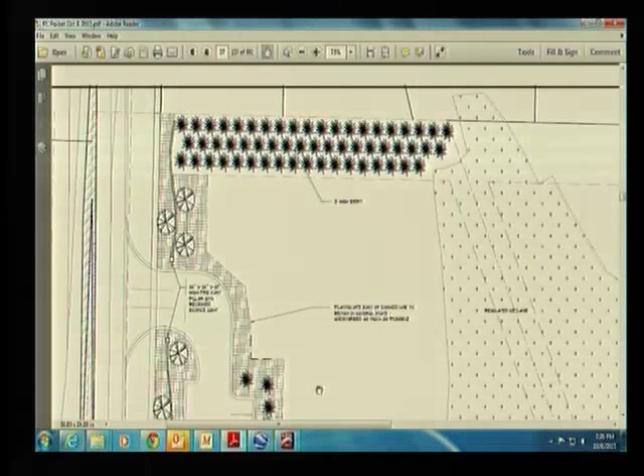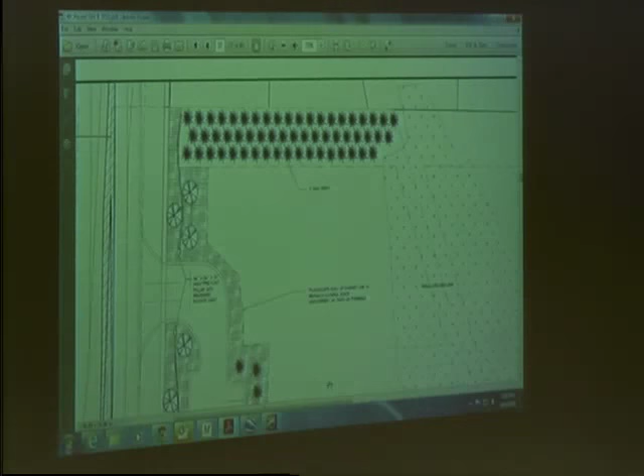I will also tell you that Mr. Hempel and his neighbor and I spoke for quite a while. We talked about pros and cons and other things they'd like. The discussion had to do with what do you want to see, how would you like to see that depicted. At first they said they'd like it mowed and looking really nice and pretty. But then we thought, we don't want somebody to come out back with an ice cream cone and think, I'm going to sit underneath those trees and have a nice park, and then sit there and look into their back rooms. So they told me they'd prefer it to be more natural. Our goal is to disturb as little as possible on the site.

The only other thing I can tell you is that we reward our staff for catching somebody who attempts to buy alcohol or cigarettes if they're underage. We give them a $50 bonus if they catch them. Unfortunately, we're humans and some people make mistakes, and if they do sell, they have to look for a job someplace else. So I want you to know we take our responsibility seriously, and we encourage everybody else to do the same. It's been our policy for 15 years or more. We take that responsibility very seriously, and we do not want to put any control in the hands of those who are not of age. That's part of our culture as a company.

We do appreciate being here, and we will be participating in the community. We have already participated in the community. You can go to the places where we have stores and businesses, go to beautiful downtown Gregory, and ask people what we do and how we participate. It's just a small local place, and I think you'll find you'll like what you hear from the majority of people. I'm sure there's somebody who won't be happy, but if you ask them, they'll tell you what they think about how we participate in the community. We feel like we're a known quantity that you can ask around about, whereas if somebody else comes in, you don't necessarily know what's behind door number two. You don't know what they're going to be like, but we're confident you can go ask about us.

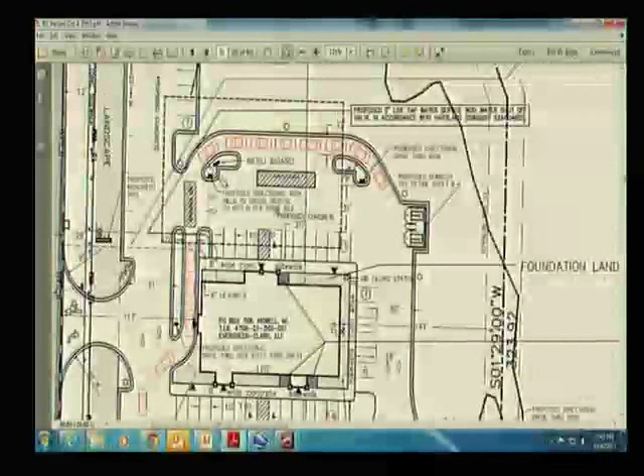Okay, access management and non-residential driveway standards. Dave? So the township in our zoning ordinance has standards regarding the width and spacing of non-residential, aka commercial, driveways - how far apart they can be relative to one another and to an intersection. But ultimately the road agencies have jurisdiction.

While the township is trying to achieve good access management practices by having adequate spacing along our commercial driveways - because anytime you get commercial driveways too close together along a high-speed road such as M59, that creates the potential for traffic conflicts - this proposed driveway along M59 is the desire of MDOT.

And in particular, if you notice, it straddles their property line. So the intent would be that this would eventually be a shared driveway for whatever may develop on this adjacent vacant commercial property, and that user would share this driveway with the proposed Mugg & Bopps.

With respect to the Clark Road driveways, again, looking to align it with Roby Drive. I know we've had a lot of discussions about having the secondary point of access. Long story short, the Road Commission has accepted these driveway locations. So while there are some slight deficiencies from our driveway spacing standards, these are the commercial driveway locations that MDOT and the Road Commission either demanded or have accepted.

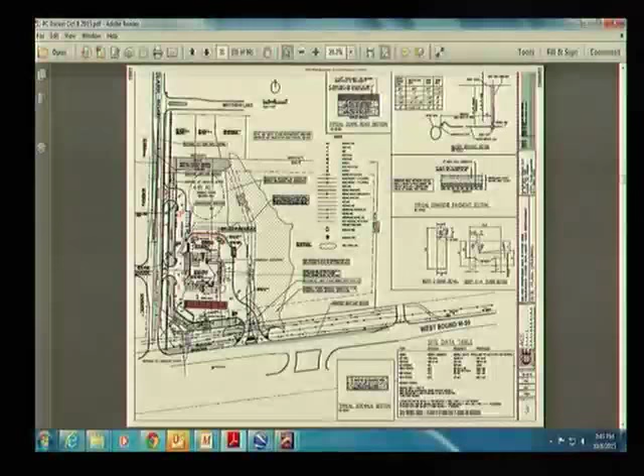The rationale would be that, as all of us in Township Hall and the folks in the neighborhood can attest, the traffic along Clark Road can queue back a certain distance. If left turns were only allowed at the northerly driveway, you would eliminate the potential for outbound left turning vehicles getting blocked in the queue by folks at the southbound approach of Clark.

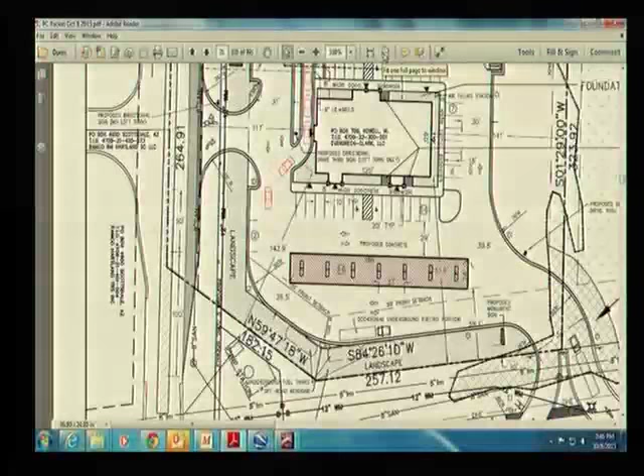I know the applicant, at least on the 16th, was going to look at that and consider the option of an island, a pork chop as we call it, to eliminate the outbound lefts, along with some signage. That's not what they're showing now, so I'd be interested in some discussion on that topic.

The only detriment I can see to that, Dave, is then you're pushing all the traffic north, and everyone who wants to enter or exit onto Clark Road has to go north first and shine headlights into the neighborhood. Whereas if you let them come out right there at Roby, I think that sort of thing will sort itself out during peak times.

People are going to say, 'Oh, I'll go north and get behind the line.' I would agree, most customers in non-peak times it'll be open. Most customers are going to learn pretty quickly to avoid going out this way to get back out to 59.

Then you're going to go right back out the same way they came in off the highway. Well, I'd agree with Jeff's comments. I think the person who wants to try making a left out onto Clark at 5 o'clock can sit there and wait. If they travel north, they can get in line on Clark Road or take 59 direct, because if they're coming out on 59, they're not going to get on Clark Road. Why would you do that? That just doesn't even make any sense.

Well, it just depends. Like he says, that's mostly out of convenience if people are going there. They're going to see an exit and take it, whatever's closest. They might not want to drive around the gas station, the gas pumps, to get out to the other exit. So yeah, they'll take the most convenient one. And at 5 o'clock, it'll be directly to 59.

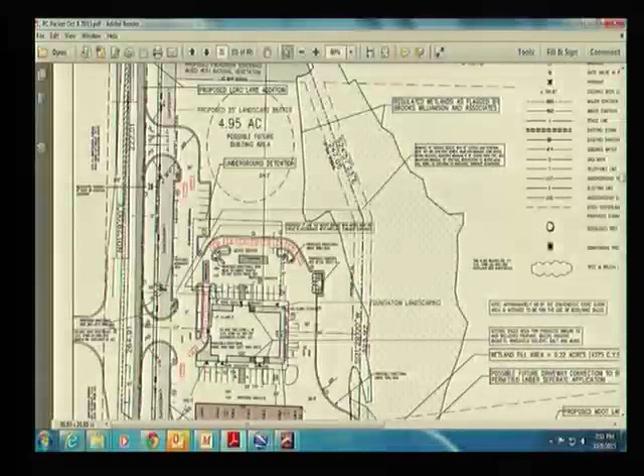I would say that if outbound left turns are going to be allowed at this driveway, it does make sense to have a dedicated left lane similar to this one, which would address two issues: outbound lefts not blocking outbound rights, and it also widens the driveway a little bit to allow for a wider turn in for the inbound trucks. That's what I would think. What do you guys think? I agree. I'm still wondering how they're going to make those trucks turn.

Well, the other issue was, I think, the way to eliminate the landscape issue with the tires going into the landscaping is to make that curb a little bit wider, so that when they do cut the turn short, they're on a hard surface, not a soft surface. Correct. So that's a possibility. Wide mountable curb. Yeah.

So is the question to add a lane or a mountable curb? Is that where we're at right now? Well, I think a mountable curb will still roll off, but I think it's going to need to be wide. Lane's going to help. I think they're saying they're going to widen it, right? So that it looks like the north. Similar to the north?

So they'll cut down on the possibility of damaging landscaping, and then they can also widen the curb. And as long as you don't get gas deliveries during the peak donut time in the morning or 5 o'clock in the afternoon, that driveway's probably not going to have anybody in it. Right. Yeah, so you can use the whole driveway at that point. So I like the added lane.

Okay, I like it wider, like the north side. Okay, so are you okay with that? That's fine. Make it similar to the north? I'm guessing they're going to have to look at a little bit of realignment relative to Roby to ensure that they have the proper lane alignment.

Okay, put in the motion here. Anything else on access management? Landscaping and screening. Sue, do you want to hit these one at a time or in total?

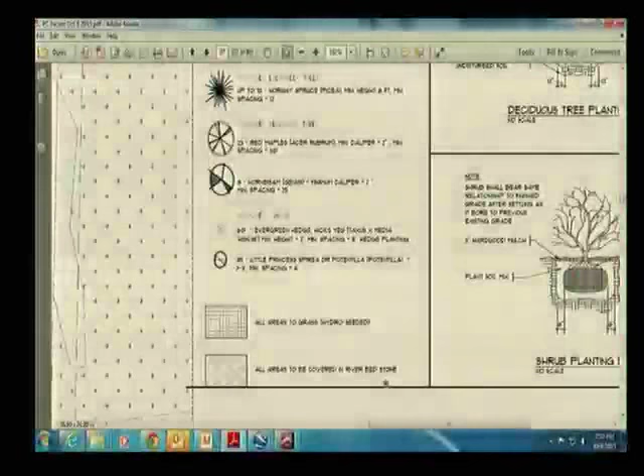Okay, and then on the size of the plant material that you've listed on your plant list, we have requirements. If I understand correctly, on your latest version, if you zoom in right there, the shade trees, I think you've got a 2-inch caliper. I don't know that they changed from what they were. And is that what they were, 2? They need to be 3 inches, the shade trees, per our ordinance. The screening evergreens need to be at least 30 inches.

I agree — what do they say on there? For that, when they're planted, they're at 30 at least, right? I think you've got a 2-foot minimum. So we just need all those sizes to be compared with our ordinance and make sure. Like the hornbeam that says 2, should that say 3? That hornbeam, where you're using it, is at the foundation building, so that's okay there — it's the one on top of the red maples.

Okay, and then the evergreens — it says 2-foot minimum, but when they're used as a screen they need to be at least 30 inches. I think they say 2 to 3 feet. Yeah, and she's saying they're going to be a minimum of 30 inches. Yep, so just try to get all those standards set.

You up with us, Dave? Yes, got it all. Okay. Anybody else on Greenbelt landscaping? If not, let's move on to foundation landscaping.

On the foundation landscaping, we have a section in our ordinance that talks about the width of it and also the frequency of the trees and shrubs. Right now, you haven't met the quantities of shrubs needed.

When we examined the drawing you sent us, apparently we didn't understand how that's calculated, because we thought the calculation didn't include all four sides of the building. We thought it was a side and a front, so that's what we calculated on. So we need 60 more feet.

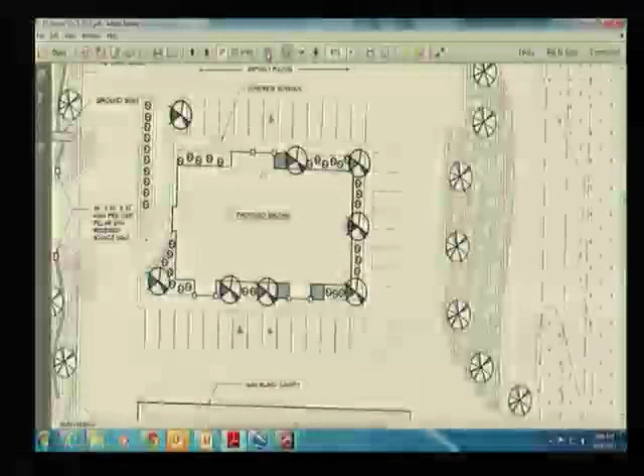I can tell you about the number of times I've been out there at 2:30 in the morning plowing snow—straight runs are nice. When I look to design and build, I want it to be functional as well as aesthetically pleasing. So I appreciate what you're saying, and I understand. I'd ask that on that corner where Dave's cursor is right now, we could put in some facilities that will do what you're saying.

I'd look for some direction from you. Do you want them full 20-foot length? Are you happy with a mushroom island—a tree in the center with curbing around it, mulch in the middle, and shrubs around, so it's a softer corner? How would you like us to approach those, Sue or Dave? I'll take the first stab—we'd be looking for some interior landscaping to meet our standards. This is a good opportunity for it. Yes, we'd be looking for a raised landscaped corner island.

It can be, and really should be, shorter than the parking spaces adjacent to it—3 feet's typical on that. In addition to breaking up the parking lot and providing some green space within it, I also think there's something to be said for it—it would enhance circulation around your site and perhaps decrease the potential for someone coming around this corner too fast and clipping a parked vehicle.

Understood. I've driven a snowplow myself and I understand the concern, but I think we can make it work with the landscape islands—3 feet less curbed, tree, shrubbery, plantings, and mulch on all four corners. So we're doing this one over here on the southwest.

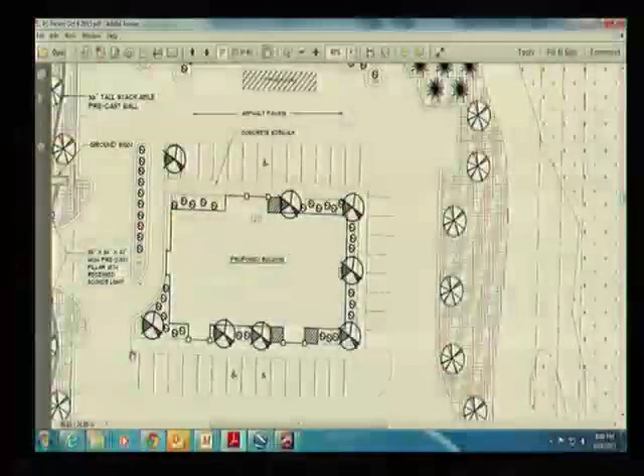That's the northwest. Yeah, there's the southwest right there. I think we might be losing a parking spot if we put one there. But as folks come out of the drive-through, that could enhance circulation. Yeah, but they could clip it too. Yeah, that corner looks fine to me. I'm happy with that corner.

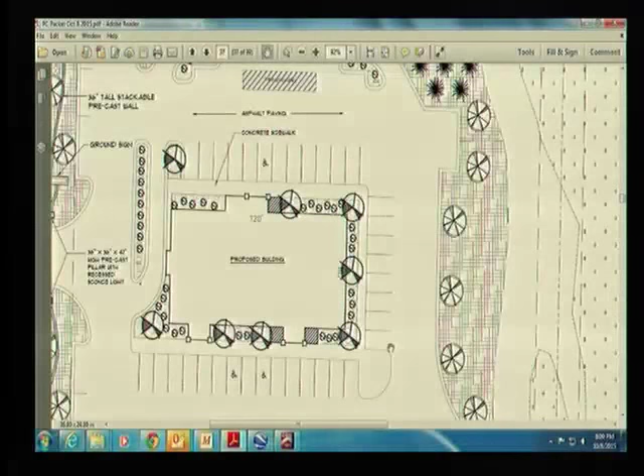I think you're going to force traffic out into the path of regular traffic after they're coming out of the drive-through. Or they can take this and head a little bit into that island, slide the parking over. We're talking about the south. Yeah, but you can gain some room. Shove it over a little, and just have a narrow strip. Duplicate the north on the southwest and shove the parking into the island over on the southeast.

We would counter that the southwest corner has a peninsula currently as it comes off the drive-through, which would signify a commitment to landscaping. I agree with you wholeheartedly on the southeast and northeast corner, and the northwest has the peninsula marked there in the drive-through. That's what we would propose. I think that southwest corner is fine the way it is. I do too. All right, you okay with that?

So we'll change the southeast and northeast parking lot corners to include a curbed landscape island with trees, shrubbery, and mulch. Sue, would you like those two to match each other? Is that your preference on those two corners? That would be ideal. Okay, and what you've got on the northwest corner currently, you've shown your tree.

We prefer a tree. And there should be at least 50% of that island covered with shrubbery. Perfect. And the ones up above on the north that cradle either side of that loading area, look at the square footage of those islands and make sure those are full. When we redo that calculation, we'll go through that with Dave, we'll fill it up. It'll be full. Before, we had so much on there, you couldn't. Okay, I agree. You remember what that was like.

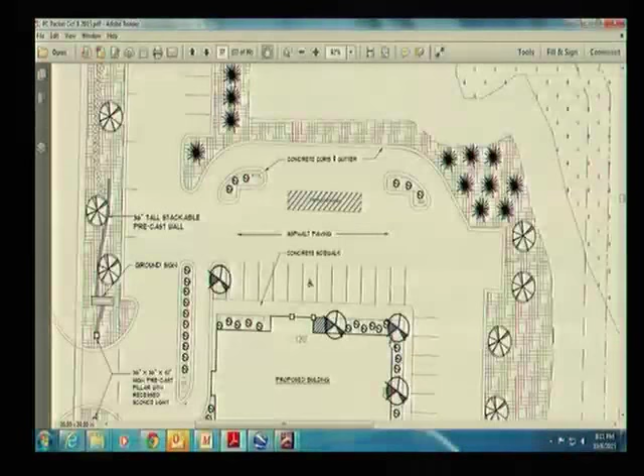So I suggested that they calculate the square footage, and look at our ordinance, because our ordinance says at least 50% should be full of shrubs, and the balance needs to be a combination of ground cover, perennials, and mulch. Right now, they're mostly completely stone with 3 shrubs in them. I just wanted to make sure those weren't overlooked, because we don't want you to come back.

Anything else on parking lot landscaping? I think adding those shrubs will be very easy to do, and converting the stone to mulch will be very easy to do.

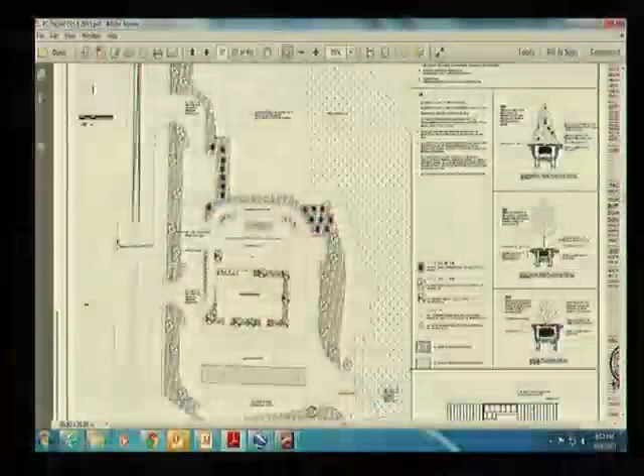Item D, perimeter landscaping, Planning Commission determination required. So the applicant is asking the Planning Commission to accept preservation of a lot of the existing vegetation within this area along the east, and then within this area to the north. You can see there's a dashed line meant to indicate where they intend to leave the existing vegetation undisturbed. So the applicant would be asking that they be given credit for that in addition to the plantings being provided to satisfy their parking lot perimeter landscaping requirements, and that is something that's permitted so long as the Planning Commission agrees with it. Staff thought there was an opportunity to maybe enhance the north area of the parking lot, so whether that's additional trees or some relocation or a combination of both, just to provide as much buffering as we can from this end of the site heading back into the residential district.

I agree with both those comments. I do want to give you credit because there is a lot of natural vegetation that's going to be left there, but I agree, Dave, that there is some opportunity right in that stretch. So sprinkle some things in there just to kind of close the gap maybe a little bit between 2 sets of plantings, and I think that would be good. Agreed, sprinkle would be good.

Area right here - you familiar where she's talking about? Yes, between the entrance to the drive-through and the exit, right along here. The whole northern section across that, yes, right kind of here.

It's a bald spot, just another buffer - open, natural buffer, residential. It's another layer of providing some screening.

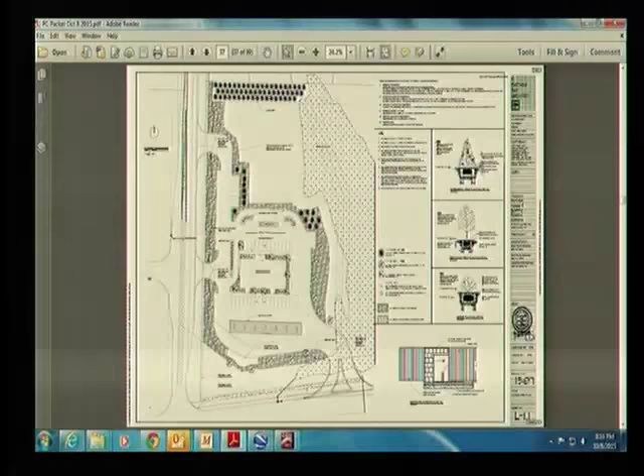There's 2 or 3 or 4 trees right in the back of Mr. Hempel's property that he said, I don't want these to be gone. And so I think that we're going to have the berm - it may not be continuous, but it will kind of come around a couple of those trees in that area.

Because they'll be left, but our expectation is that we'll be putting in between 50 and 75 trees across here, and it just depends on what happens over here. The feeling that we have is that if we come up with a 3-foot elevation across that back and the majority of the area there...

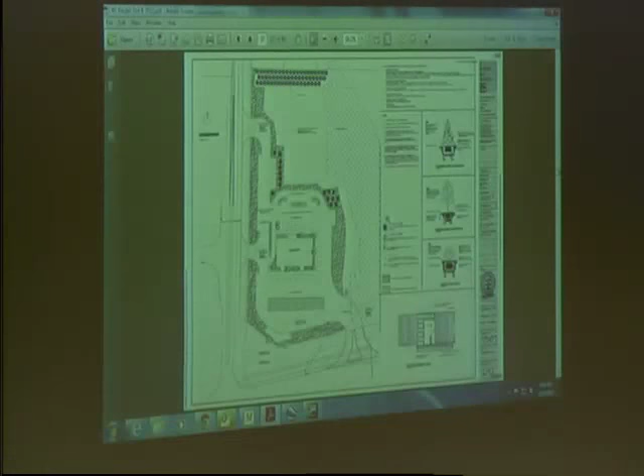It will, with - and we spoke to Dave also, when we order trees, it'll be 8 to 10 foot trees, and it will be 2 varieties of spruce so that we ensure that we don't have like what's happening with, was it the blue spruce. So anyways, it's going to require some determination by the installer.

But we're committed to making sure that this is a forest across here. And if we have to come out a little bit, it may not be that perfect line in rows like that, but it's going to be a forest, and it's our goal to block the property from seeing things.

So it's not just the 2 rows, we think that the 3 rows will give us that because, as you pointed out along the front with the changing grades, Sue...

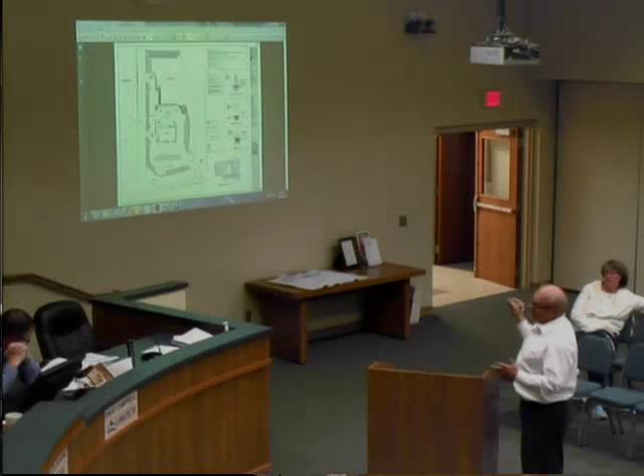We want to have a top surface area that's pretty wide, so that certainly that one main row will be as tall as it can be, and then you've got to be spaced out a little bit, and they may be off that edge. I don't know how they'll fit in, but I don't know if that makes sense to you. I know it's a little bit abstract, but I can tell you that we will build the forest there.

And block it. How are we going to? So if we don't get it right the first time, we will get it right the second.

So, if I can jump in, I think there's certainly something to be said for preserving some of the vegetation that's back there, which is mature and big and serving a purpose for screening and buffering. I don't think the answer is to clear all that out in order to create the 3 rows that he's showing, nor do I think is that necessarily Mr. Leekander's intent. I know he and I had a chance to talk about this a week or so ago.

I think what could be a solution to this is for Mr. Leekander to commit to a certain quantity of trees, whether that number is - I think he mentioned a range of 50-something to 70-something.

Commit to a certain quantity, and commit to a certain percentage of that quantity being 8 foot, a certain percentage being 10, and if we want to go up to 12. Then give some flexibility to have some field discretion once these trees actually go in, rather than saying that tree must go there because that's what's shown on the site plan, even if it means taking down a quality mature tree that's already there, as long as he's meeting the requirements for quantities, general location, and heights of the trees proposed, there could be some field decisions once they actually go in.

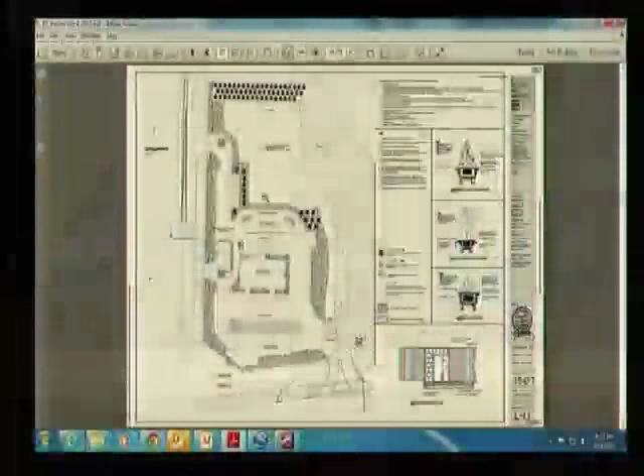And we've got a wall around the parking lot anyway, right, that we think we're going to be screening most of the headlights with. Well, when you say wall, are you referring to the addition of trees through here? Well, and where's this wall? Clark Road wall. No, that's just decorative. That's on the perimeter, yeah.

Okay, where we're at, we are adding screening to the north side of the park. Yeah, I know, I'm just trying to think of what the sight line is going to be. Well, I have a question for Sue.

Sue, does a conifer tree generally, if left alone, keep the branches that grow to the ground, or do they die back for some reason? Typically, when you let them be and you're not weed whipping or whatever, you can get them right down to the ground, and they should stay at the base. It's when people start to mow and trim and limb them up—but typically they should go down to the ground, so you're not going to be looking underneath the branches.

That was my concern. That's what it seemed to me like. So any height that we can add—but again, with the grading, we understand if you can get a very naturalistic berm, that would help with it. But it's got to be, like you say, kind of figured out in the field to make it work. Well, I don't like the idea of figuring it out in the field.

I know—because it becomes very tough to add anything later. I understand you're committed to it, but it becomes tough for us to force you to do it because it's not on a site plan anymore. Well, and we don't want to kill anything that's there either. And that's my point—and your point. Hold on, just let me finish here.

My point is that I think a survey can be taken out there, and you can pinpoint the trees that you want to leave, and you can design easily a naturally looking berm. Happens all the time, so I think it can happen. I think it can be on the site plan. It doesn't have to be strict, and I understand that in the field you're going to make changes on the fly, but at least there'll be a general direction noted on the plan that we can get back to.

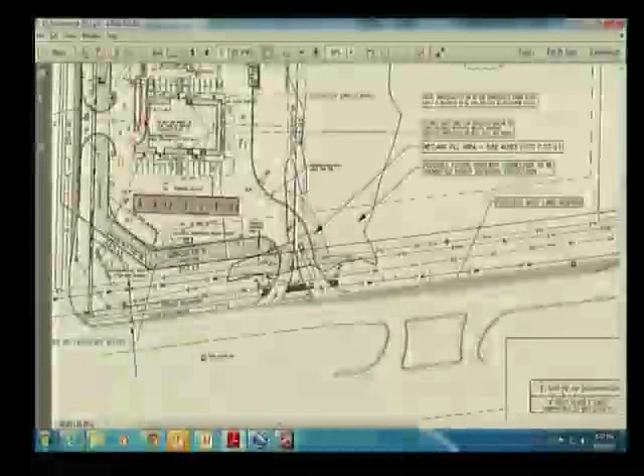Where's your property line at in relation to that? It is just at that 257.12, that's our property line. The eastern property line, yeah, the north-south line, it cuts in right there. It splits the parcel right there, chops it.

So we're saying that the next development would have to make that connection. Well, we think it should come right up here. Right, so it'd be straight across, then right up here, and then over, because otherwise you're into the wetland, and that poses some additional problems. I can see that on the grading plan.

It would be consistent with the sidewalk pathway separation from M59 on the west side of Clark Road, and there would be opportunity to get an alignment when we get this gap filled on this property. I've had some conversations with MDOT, and this was something they were looking for too. So if the planning commission's comfortable with it, we could leave the pathway as proposed, subject to MDOT review.

Correct, it's identified as a canopy on the drawing. It is, it's an area to cover those. It's curved, I believe. That particular one is going to be square coming out, and it curves out. And yes.

Is that the same color scheme you've used on the other Mugg & Bopps? This green is different now, but everything else is very similar to the other colors. So this green is just adding a little bit of color where the entry awning, if you will, is located. It's just a little structure there. Do you know if that's clay brick or masonry brick?

It is man-made, but... it says it's porous. I would guess it's clay. That would be a guess. Well, clay's required, that's why I'm asking. I'm guessing it's what you're expecting to see.

That's what I believe. Is that what it says on the drawing? Yeah, I can see, but we were intending for it to be real brick, not what you'd think of as fake painted stuff.

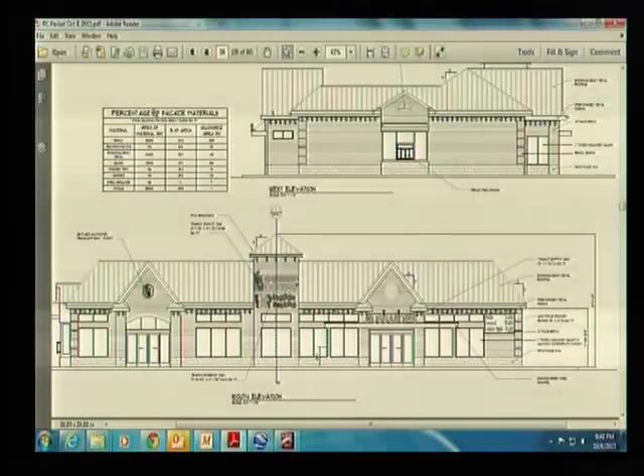What is the gas canopy top? We have the brick columns, and then it goes to a round metal pole, and then of course we have this metal roof structure.

What colors is that on the plan? It's dependent on the brand of the fuel. Okay, you're talking about the facade, the fascia band on the canopy? We don't know what brand of fuel that's going to be there at this moment, Larry.

Okay, well, we should talk about the dissonant color thing. We typically haven't seen bright blue or bright green canopies. I think you can have the color band in that, but I don't know if we've seen them all green or all blue, because those are probably the two colors you're thinking of, or if it's Shell, it could be orange or yellow.

I would say that the base color would be the white underneath of the fascia itself, and then depending on the brand, they have a band that you're talking about that they identify their canopy with.

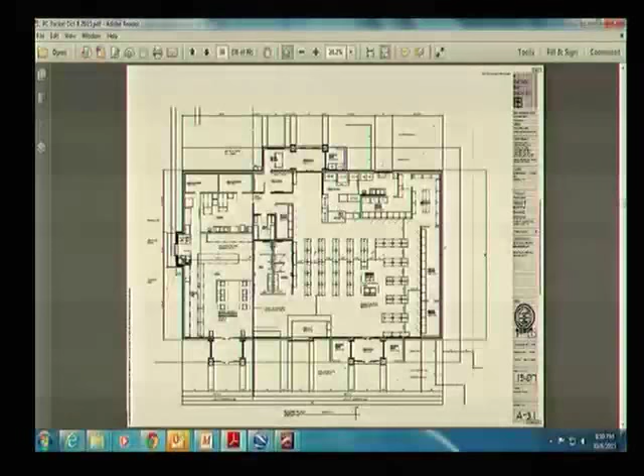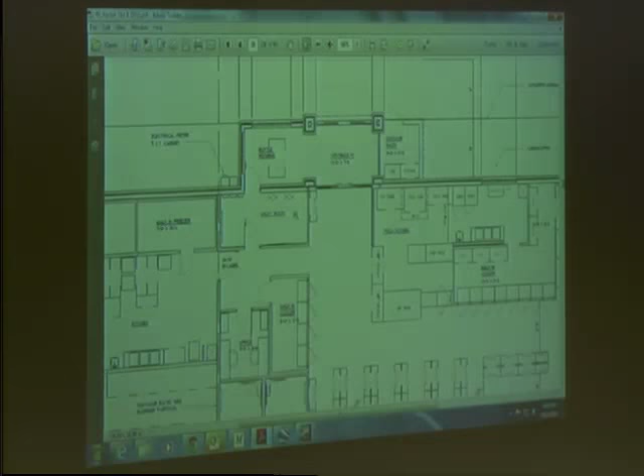Let me add one item: this area right here is where we're expecting to have a space for bottles, so the consumer, when they come in, can use the bottle machine to get rid of bottles and cans. It may end up on this side as opposed to that side. I don't want to surprise you, but I wanted you to know the final design, so that when they walk in we'd like them not to bring dirty returnables into the store. When you enter the back vestibule, you'd be on the right or left-hand side to a bottle room, depending on which back room we use to service that space.

The opposite of that would be the covered, walled outdoor sales area. That's fine, you'd be surprised by that. So if you flip the bottle return room, you'd flip that utility room too? It's very possible, I just want you to know we're finalizing all that. So it's internal anyway, stay tuned. It's the same thing, but a mirror image.

Did you need any more questions or conversation on that? The outdoor sales area is pretty common. You did add a wall, though, at the stations I think. They're there, it was there last time, and we recognize that they're there. So that's where that stuff goes, there won't be stuff out at the pumps and those kinds of things. Not unless you change your ordinance.

All right, pallets and mulch, not unless you change your ordinance. All right, thank you. Did we need to cover anything else on that point? No, you would just be acknowledging that they are providing an outdoor sales area, and making a determination that it's permitted so long as it's contained within those designated areas.

All right, so item 6: the applicant will provide the township with documentation from a sound professional which demonstrates compliance with the standards of 4.283, which requires that no sound from speakers shall be audible at the property boundaries.

As you can see, he's proposing the office building with the parking on the south side. This was by design to keep the parking on the west or south side of the building, again to minimize impacts on the residential properties to the north. He is proposing an overhead door on the west side of the building. My understanding is the back of the building is where the owner would keep some of his equipment and tools, things like that. So he does want drive-up access to that.

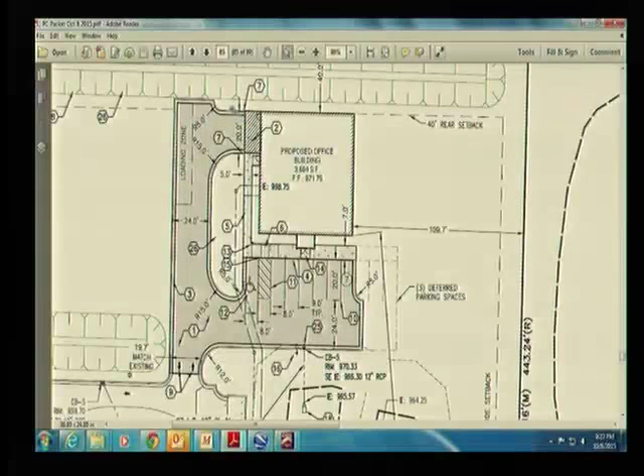One of the things I want to talk about is the width of this proposed access lane. The applicant is proposing a typical 24-foot wide commercial drive. The Planning Commission does have the discretion, if they so choose, to narrow that, again to minimize impervious surface and minimize the view for the people who live next door. The applicant has submitted a landscape plan to provide a berm and screening to those residential properties, and we'll have an opportunity to talk about that.

Procedurally, this is considered a site plan. He is not amending the special land use component of the restaurant. The KFC with a drive-through was a special land use and had to go to the township board for approval. This being just the office building doesn't otherwise alter the drive-through component, so it is not amending the special land use. Therefore, it is a site plan that can be approved by the Planning Commission without another trip to the Township Board.

The recommendation of staff in our letter dated October 1st, 2015, is conditional site plan approval, subject to a number of issues being addressed on a revised submittal that we would review administratively, so long as the Planning Commission is comfortable with certain decisions within their authority to make, particularly the deferred parking. We're seeking deferred parking for this office building, and some discretionary decisions regarding screening and buffering, particularly along the north property line. With that, I'll pause and see if the Planning Commission has any questions in particular.

Otherwise, obviously, the applicant's here to likely make a presentation of their own, and we're going to let him do that. So the floor is yours. Well, thank you. I'm Bill Beckett, W2 Development, working with Glenn Llewellyn here.

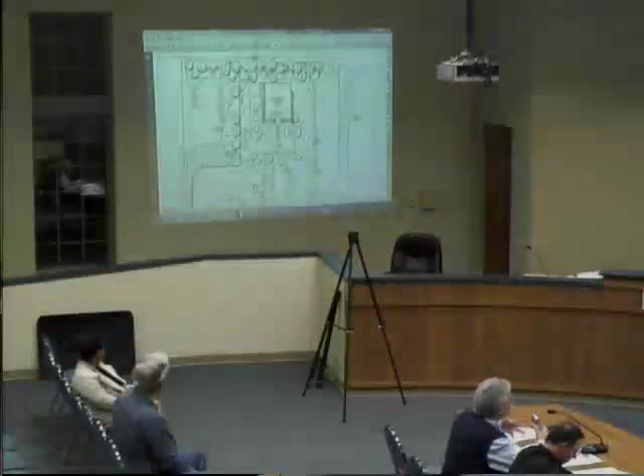We would be willing to shorten the berm, spot locate some of the trees using the same material count, and enhance some of the plantings along the east side as Dave suggested in his report.

In addition, I think there was a discussion with regards to adding a screen wall, an extension of the rear wall of the building. The north wall would extend to the west to the limits of the service drive to the overhead door, so that could probably be about a 30 or 40 foot wall, approximately 6 feet tall, same materials as the building is.

So in talking with Glenn about that, that is something that would be reasonable to do.

In terms of building materials, we have sample boards in front of us. Again, the color scheme—do you want me to pick that up? Can you see that up?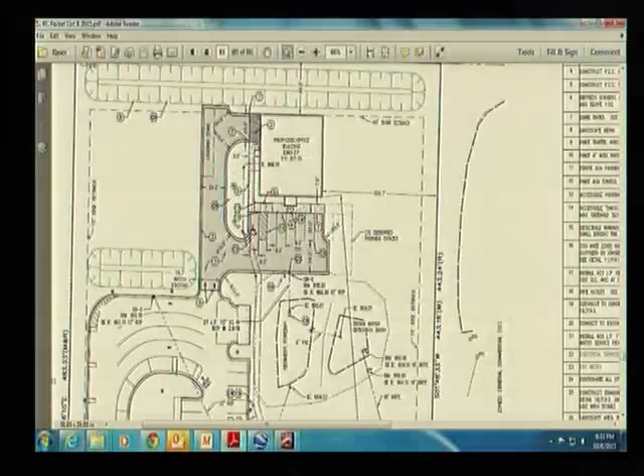I believe at that point he was thinking he was going to meet his minimum parking requirements by adding some parking to the west side of the building. Our thought in that concept meeting was let's not provide any extra parking that we agree probably isn't needed for this office building until that need arises. So what the applicant is proposing is to keep the parking on the south side of the building, again, minimizing to the extent we can any impacts to the residential development to the north, with the opportunity for 3 more spaces to the east should the need arise.

The Planning Commission does have the discretion to allow for deferred parking in a case where it can be demonstrated that meeting the township's typical parking minimums wouldn't be optimal, and I think this is one of those cases. Well, obviously the applicant feels that way because that's what you proposed. We run probably 3 to 4 people at our office, 3 to 4 days a week.

We had originally had those parking spaces on there, but again, to help with screening of the neighborhood back there, there's no point to put those parking spaces in. What we have to be cognizant of is if someday this is no longer Mr. Flewelling's office, but he sells it as some other office building, insurance office, whatever it may be, we at least know there's an opportunity to put in the additional minimum parking if and when that day comes. So that's where we show the dashed line and the deferred parking.

Correct. Everybody fine with that? Absolutely. Okay, we're good. Barrier-free parking, we're good. Parking lot, driveway, internal roads, we're all good on. Loading, let's talk about a 12-foot service drive and a T turnaround.

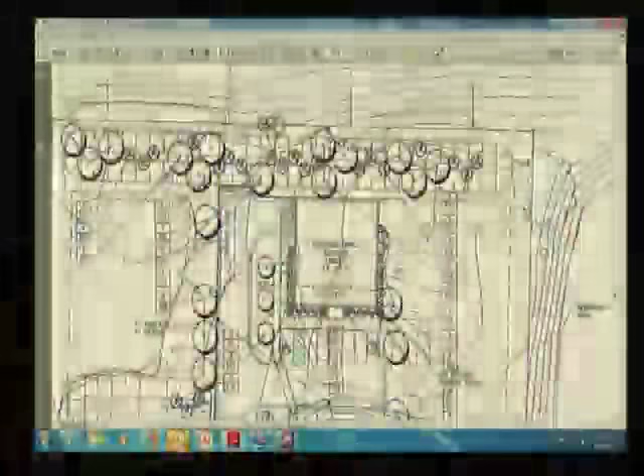If you look on the site plan and extend the new west driveway line straight north to the residential area, it is shown. If you extend this curb line straight north, that's in line with the property line between these two houses. At that point there's a couple of oak trees that are a little bit offset, but that line generally is where there's heavy screening existing already, and then it kind of filters and gets fairly light over on the east edge.

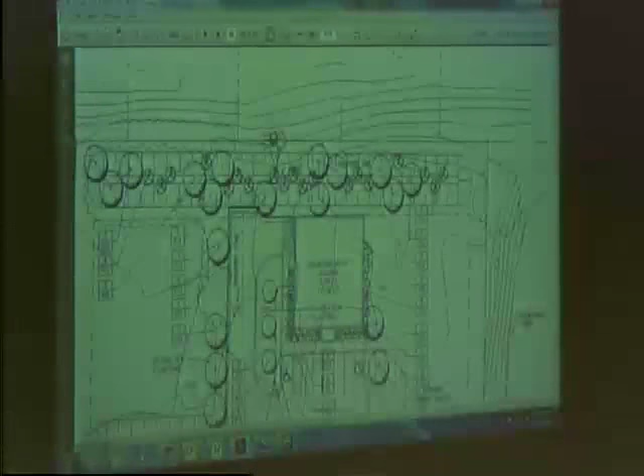Looking at it like that, it would make more sense to spot trees within that area rather than just bulldoze and create a new berm. I think it would take several years to recover from constructing a berm and planting trees on it.

Yeah, those trees are huge that are there.

Well, I think staff concurs. If we could maintain the same quantity of trees proposed along here but avoid the berming at least up to that area, then we're not hauling in dirt and taking out vegetation to replace it with a berm. We can spot plant this same quantity of trees and start the berm where this good stand of existing vegetation peters off, then create the berm from about this line all the way to close to the east property line.

Our thinking is we don't want to cut any trees out, but take those trees that should be in the west and push them all to the east to make sure it's just as thick all the way along back there, because the west, for whatever reason, is so thick. If we push those trees over there, we'll be thick the whole way along.

So he's saying something different than you said, Dave. You said take the berm out but leave the trees and spot them. He's saying take the berm out, take the trees that were there, and move them to the east. Well, I think he's talking about the ones on the drawing. Yeah, the trees to be newly planted. The new stuff, right. But what we're saying is you might want to still plant some new trees on that western portion.

Yeah, spotted, to fill gaps and things like that. Get some evergreen trees in there too, because you're right, it's all deciduous. It's a lot of deciduous. Our 6 months of no leaves.

So Dave has 3 points in this particular topic. Some variation in the height of the evergreens should be considered, since they're all proposed to be 8-footers. I need to go back and read the ordinance, because I know we require a variation in height. I thought it was 8, 10, 12 after the last applicant said no, and it's got me questioning it. This is, of course, the one meeting where I forgot to bring my copy of the ordinance.

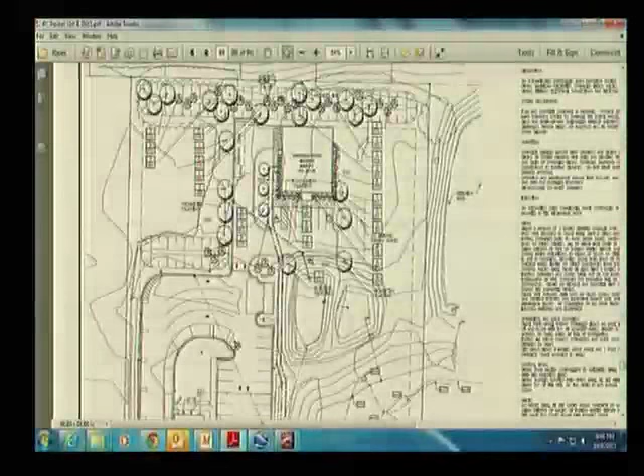So, Dave, we need some lighting comments from you here. We have minimums for the illumination levels at various components of the site. It has to be at a certain minimum at your building entrance, a separate minimum for your parking lot, and another minimum for your entrance. In general, there's a couple dim spots in this parking lot, but that's not by design. When we had conversations with the applicant, we asked them to keep the parking lot lighting on the south side of the building and to keep it at a height where the building itself would be taller than the lighting, to do everything possible to screen that additional parking lot lighting and the existing parking lot lighting from the neighborhood. So even though the parking lot gets a little bit below our minimums, the Planning Commission does have the authority to allow that, and the justification would be, again, we don't want to overlight the site, especially for a 9 to 5 office use that is not going to be getting a lot of nighttime use anyway.

Am I understanding that there's no lighting on the building at all? There's no wall sconces on the building. We will have some soffit lighting on the west and south elevations that would wash the wall a little bit, as well as provide sufficient lighting for the sidewalks. Right, we're trying not to make it very bright. I understand, I just, for security reasons and in case there's any emergency incident in the middle of the night, you never know. Plus the winter hours, it's dark early and dark late, it stays dark late in the morning. Yeah, and you could put a motion detector and still have lighting.

I appreciate what you're trying to do, I'm just concerned about it. Well, we talked about that actually today, and we were worried about the animals. What we don't want is motion lights going off and then the people in the neighborhood getting upset because animals are setting off these security lights when we're trying to not have a lot of light. Animals, you mean like? I mean, we can add light, but... Well, it may be sconce lights, I didn't even realize you had that, so I guess that's better than what I thought. Soffit lights, I'm sorry. Yeah, that would be built into the overhang of the building, and we figured that gave us sufficient light and wouldn't upset the neighbors at the same time.

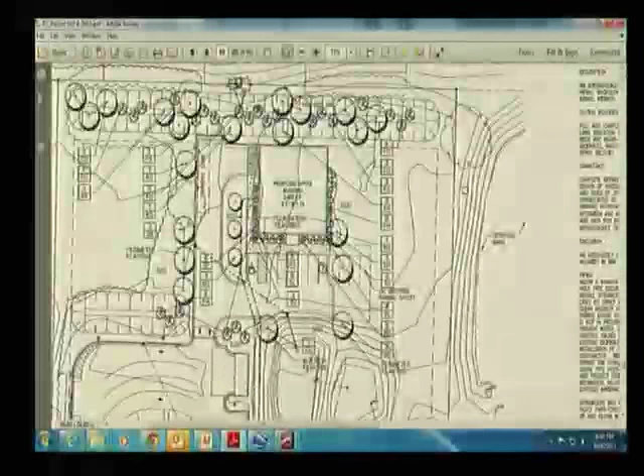I think the applicant has already said they're willing to work with it. We're suggesting a wing wall that would go at least from this corner of the building as far out as the service drive, 6 feet tall perhaps, to match the building, just to screen any headlights. If Mr. Flewelling or anyone else is coming back here with their headlights on, they're not shining them back into these folks' backyards.

So a 6-foot brick wall to match the building. We're thinking the same base and then the other brick on top, and then some kind of concrete cap on it—yeah, limestone looking cap. Yep, okay, we're good with that. You guys good with that? I think it'd be a nice addition.

Architecture, building materials, anybody got any comments? Looks like they're pretty much, for the most part, in compliance. Close.

Thoughts on it? Appreciate the residential flair to it, I will agree with that. That's figured nice, that would be a good buffer. Well, the building itself buffers your restaurant from the residential. Well, I think it's a nice transition. Yeah.

Any comments on architecture? You guys all good with it? Good, everybody? All right, so signage—no signage is needed?

I think you mentioned maybe just a moderate signage on the windows, just some etched lettering. Oh, well, yeah, it'll just say our address, and then Lucky Dining, but I mean, no signage—we don't need any signage or anything.

Okay, nothing out at the road, no additions to the monument sign? Okay, put a big Colonel statue out there. Yeah, two of them, chicken leg. Big boy. Yeah.

All the DPW, engineer, fire authority, MDOT letters—anything, anybody have any questions or comments on them? If not, what would you like to do with this site plan this evening?